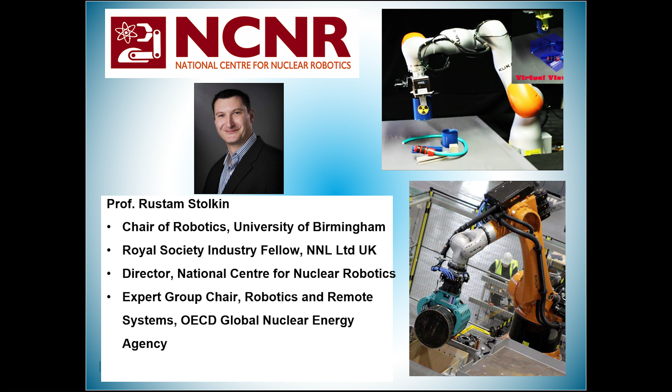My name is Rustam Stolkin. I'm Chair of Robotics at University of Birmingham. I'm also Royal Society Industry Fellow for Robotics, partly embedded with the National Nuclear Laboratory, UK. I'm Director of the National Centre for Nuclear Robotics, and I'm also Chair of the Expert Group on Robotic and Remote Systems for the OECD's Global Nuclear Energy Agency.

The National Centre for Nuclear Robotics was founded in 2017 with a £14 million grant from the Industrial Strategy Challenge Fund, originally a consortium of 8 universities. Via our Flexible Partnership Fund, we expanded to include 12 research institutions across the country from Scotland down to the south coast. In the first 3 years, we produced well over 300 peer-reviewed papers. In addition to robotics, AI and associated engineering, we also expanded to the humanities, political and social sciences, and issues of management, regulation and policy.

We've delivered a very large number of world-first landmark deployments of robots on nuclear industry sites in the UK and internationally. We've also had impact across a number of other industrial sectors, and we've undertaken significant international leadership in EU robotics and also with the OECD's Global Nuclear Energy Agency.

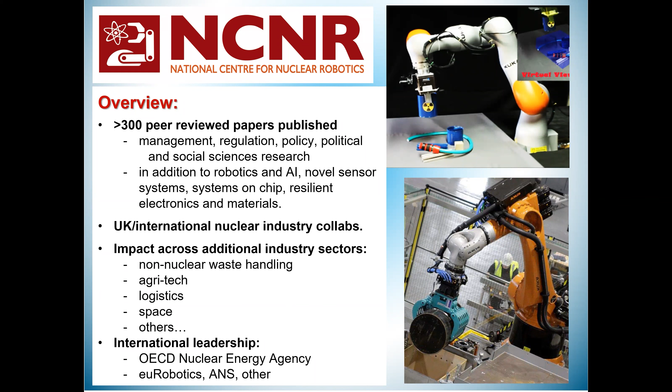I can't discuss in detail all of our research, but it spans a very broad range from advanced robotic manipulation and air and ground vehicles, robotic vision and perception, and also the human aspect and cognitive factors of human-robot interaction, advanced machine learning and AI, sensor systems, radiation-resilient electronics, and autonomous mapping and navigation.

The past 3 years has seen the creation of a number of very significant robotics installations at both Birmingham and our partner sites. These are major robotics infrastructure for long-term use by the research and industrial communities. In this case, you can see the very large 3-ton robotic manipulators set up at our Birmingham Tyseley site, which are the same robots as are going into the Sellafield plants for robotic waste sorting and segregation.

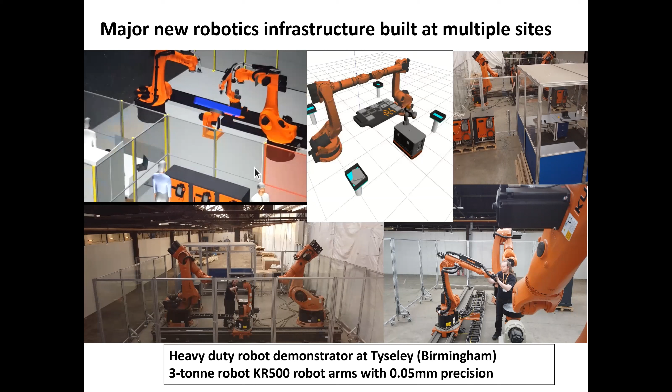So National Centre for Nuclear Robotics spans a very broad range of different kinds of robotic activity, but we are particularly strong on advanced manipulation with robot arms and hands.

This is work from University of Birmingham on fully autonomous robotic grasping, and these are objects for which the robot has no prior knowledge and no prior models and doesn't require even any training data. And what we're addressing here is the very difficult problem of grasping and removing objects from very cluttered random heaps of objects.

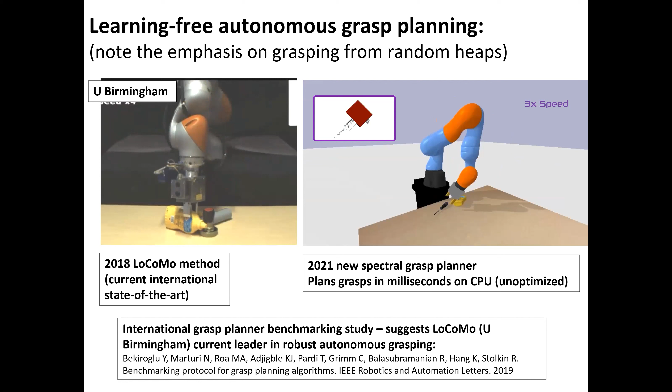National Centre for Nuclear Robotics has a major strength in advanced robotic manipulation. This is currently world-leading work on fully autonomous grasping and manipulation of unknown objects of arbitrary shapes from random heaps using computer vision.

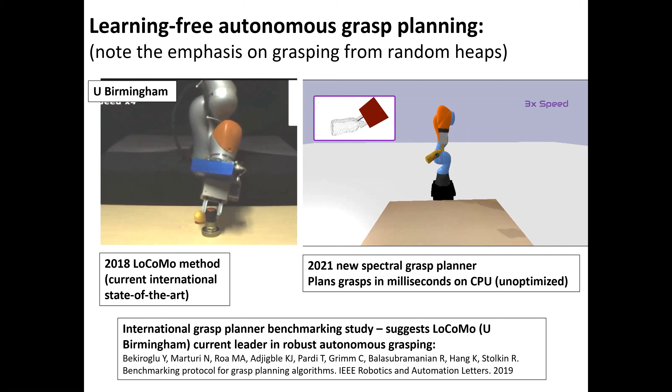Another way that we can augment computer vision is with tactile sensing. Here on the right, you can see a robot feeling its way around a hexagonal bolt, using its torque sensors to perceive shape. And on the bottom right, you can see that it's successfully reconstructed the hexagonal shape of the bolt head.

On the left, you're seeing a very advanced dexterous hand with tactile sensor arrays, and it's making successive tactile glances of an object to gradually improve its understanding of the object's shape. But at the same time, it's also simultaneously refining its grasp pose to find the most robust and secure grasp while it's also exploring.

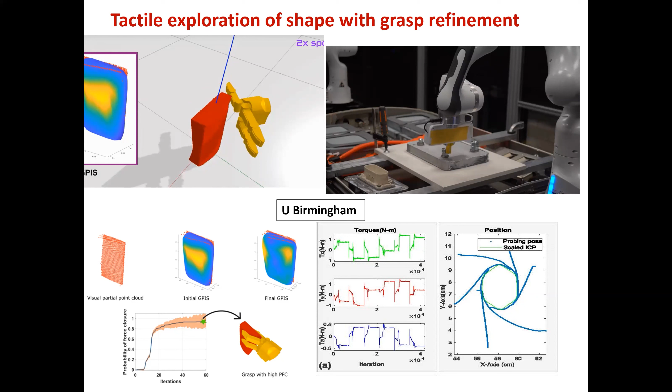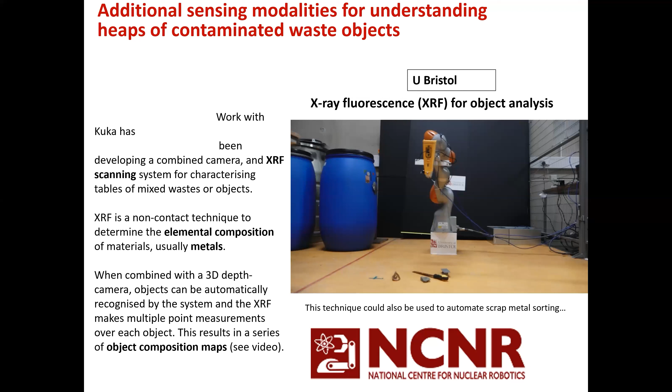Adding additional kinds of sensors can further assist with this problem. This is work from University of Bristol using XRF sensors to look at objects in a heap and tell the different materials of the objects from each other, which can help for sorting and segregation and also disambiguating objects.

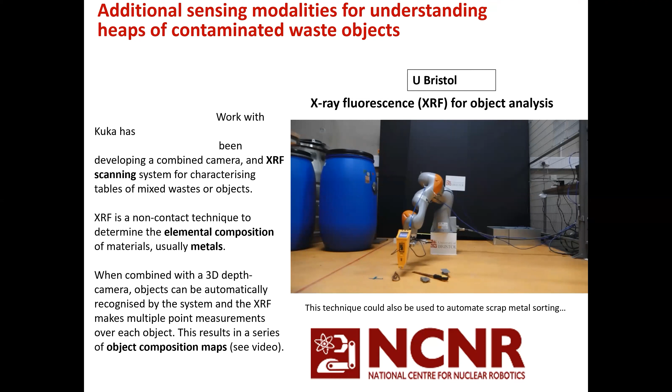So what we previously showed you was fully autonomous manipulation, but here is work from University of Lincoln working with University of West England at Bristol Robotics Lab on teleoperation, using one robot as a master to control an identical remote robot in a leader-follower paradigm. You can see that using both robots as leader and follower provides a very intuitive and easy to use control interface.

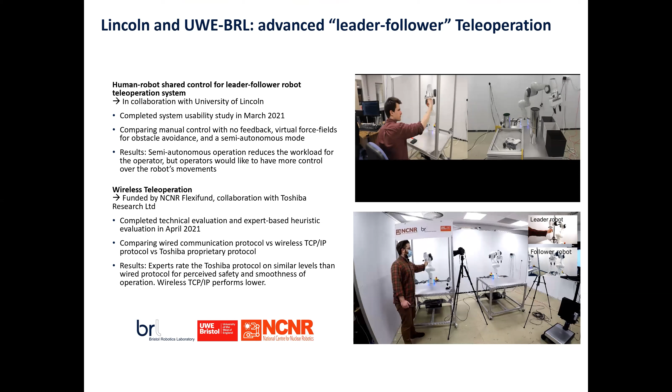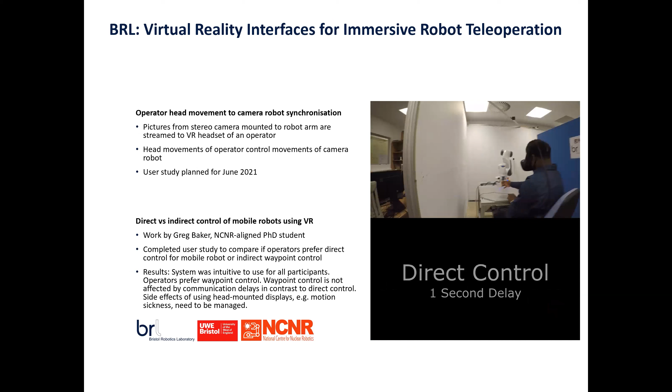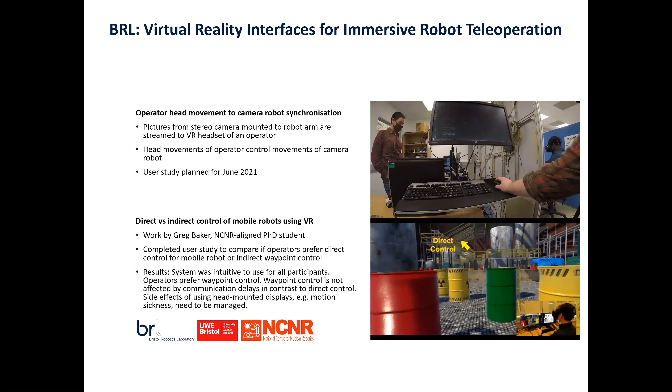So to support this remote handling and control of remote manipulators, we need situational awareness, and this is work from Bristol Robotics Lab, University of West England, on telepresence and advanced ways of allowing operators to perceive what's happening at the site of the remote robot in the hazardous zone.

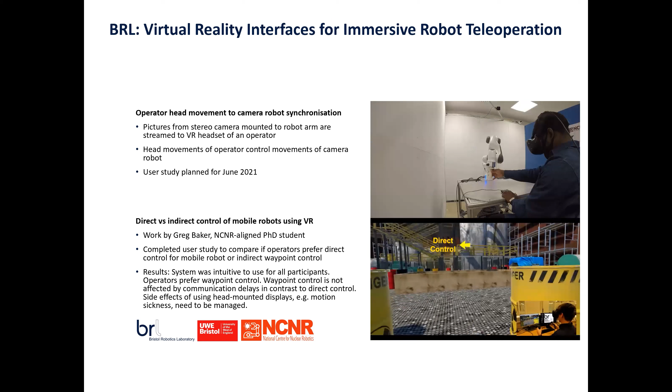So this is work from Queen Mary, and this is the design of very novel kinds of manipulators, soft manipulators, called an eversion manipulator, so it extrudes itself from the inside, and you can see that this can travel through narrow pipes, tubes and openings, and it can deliver cameras and sensors to hard to reach places. It's soft so that it will not damage any delicate pipework or other infrastructure.

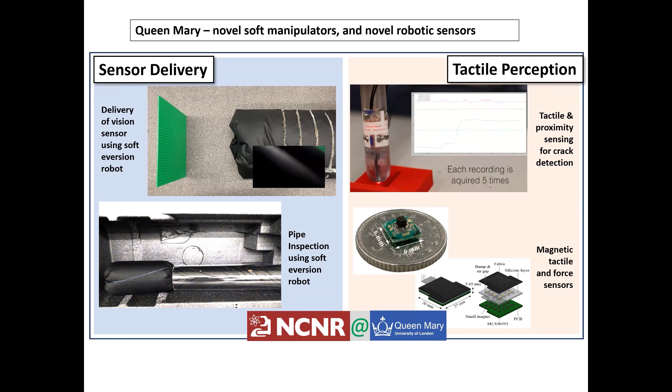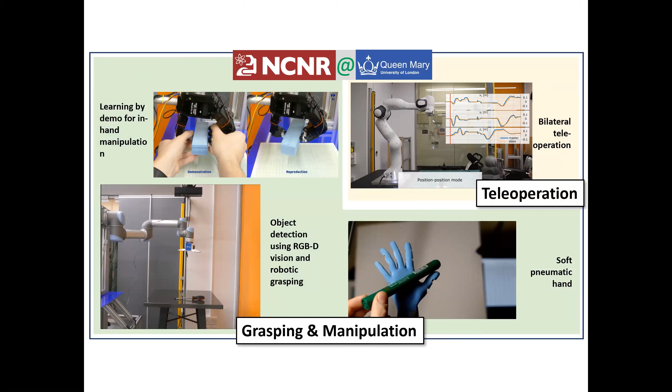And there's also been interesting work developing novel forms of sensors, novel tactile sensors and things like that. Queen Mary has also been working on teleoperation of manipulators with haptic feedback and soft manipulators as gripping tools.

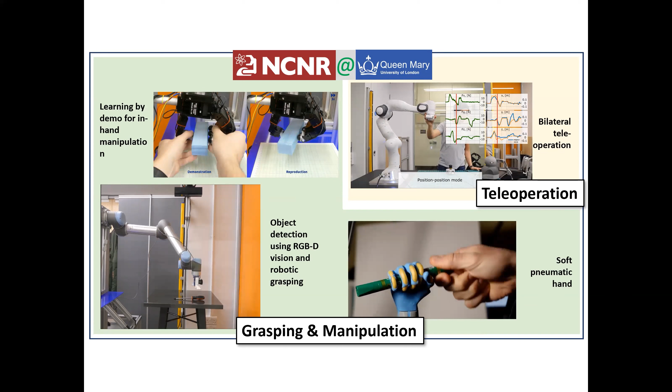At the opposite end of this spectrum from the lightweight soft manipulators is work happening at Lancaster University on very, very heavy duty, powerful hydraulic manipulators. I believe they're the only lab in the UK, possibly in Europe, that actually does work on this heavy duty hydraulic machinery, which is widely used throughout the nuclear industry, so it's particularly important. It has extremely complex dynamics and control problems to control the actuated joints in the ways that you want.

Related mathematics can also be used to look at the complex control problems of quadcopter drone robots.

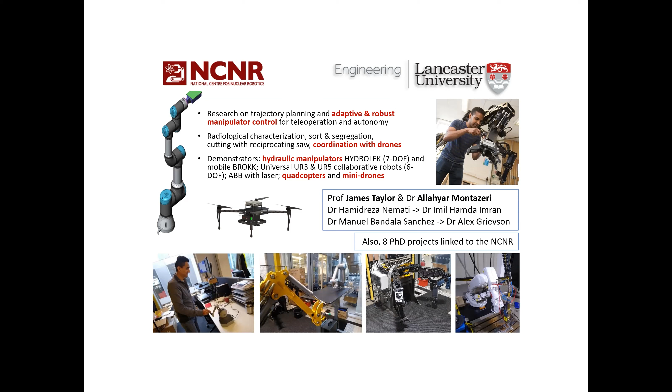Lancaster's work was on the low-level control of the joints of the manipulators. At Birmingham, we focused more on the high-level planning of the motions. Here you can see a mobile manipulator planning cutting actions and cutting paths. What's difficult here is you have to plan the motion of the wheels of the vehicle, the motion of the joints of the arm, and the motion of the cutting tool over the cut surface, and all three of those motions have to be planned mutually with respect to each other to be consistent.

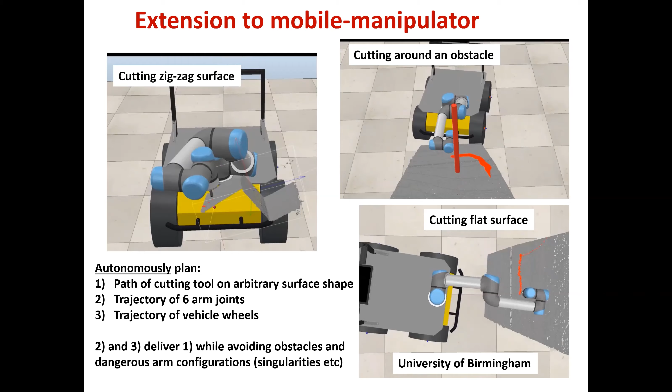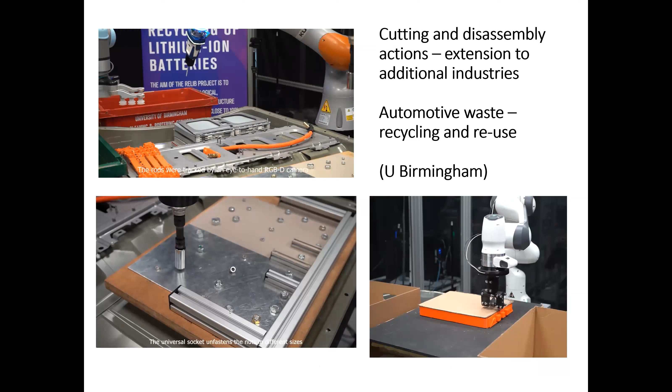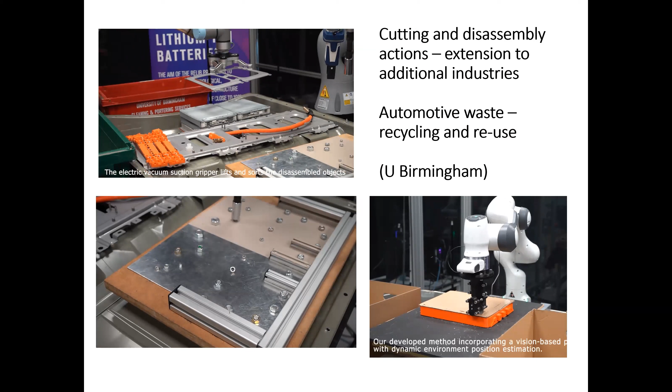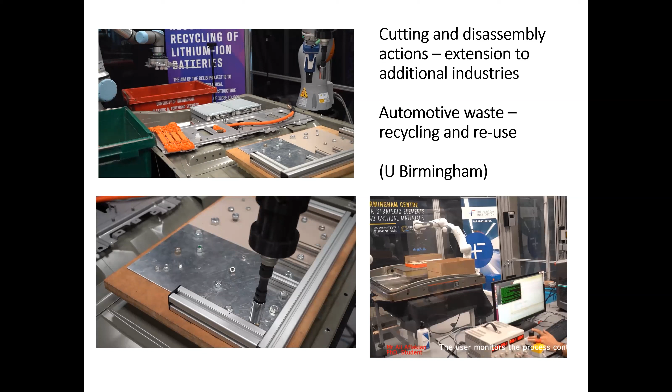One of the remits from the Industrial Strategy Challenge was that, as well as having strength in nuclear, we should show how these generic robot technologies can be applied to other industries and societal problems. Here we're looking at handling of non-nuclear waste, in particular how to deal with the very large lithium ion battery packs in electric vehicles, which is actually a potentially very hazardous form of waste. Here you can see robots performing very complex disassembly operations, cutting and unbolting and removing components from these very complex waste streams.

Bringing us back to the radioactive environment, all of these robots need to operate in various kinds of radiation fields and radiation environments. University of Essex has done fantastic work building partnerships with NASA Jet Propulsion Lab, Rutherford Appleton Lab, and the National Physical Laboratory, and these organizations have radiation facilities that they've made available to Essex.

What you can see here is Essex putting cameras, sensors, circuit boards, and computer chips inside radioactive chambers and bombarding them with radiation to see how they deteriorate and model that deterioration. On the bottom right, what you're seeing is a camera in a radiation field, and that bright speckling is the radiation particles hitting the pixels of the camera.

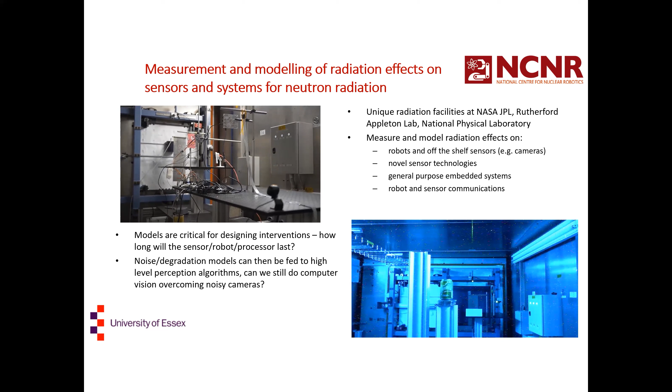To overcome these challenges, Essex has been developing very novel methods to make systems on chip resilient, including self-healing electronics - electronic systems that detect their own faults, computers detecting their own faults and self-healing to rearrange themselves to repair those faulty parts. Some of this is now working using deep learning to learn how to automatically adapt firmware, software, and hardware to overcome these faults.

There's further work also now that we can put complex electronics into high radiation environments. University of Bristol has carried out deployment with Sellafield with a crane-mounted sensor package - the suitcase, if you like - and this is building up 3D maps of the stored material in radioactive waste stores and mapping the radiation emissions from them as well.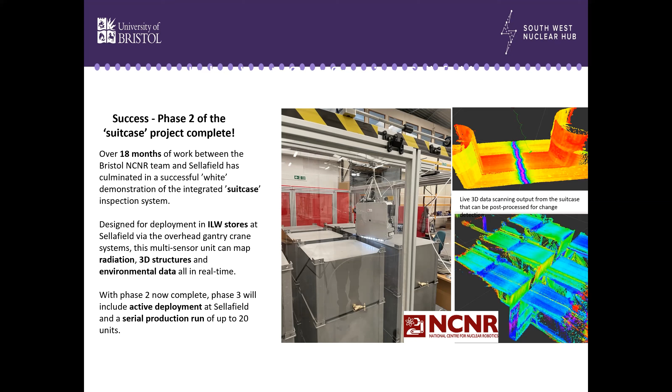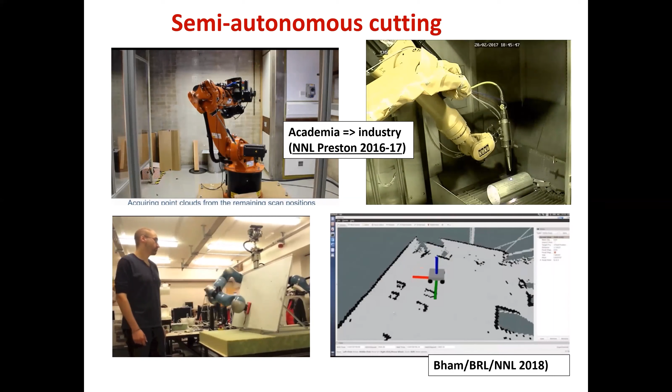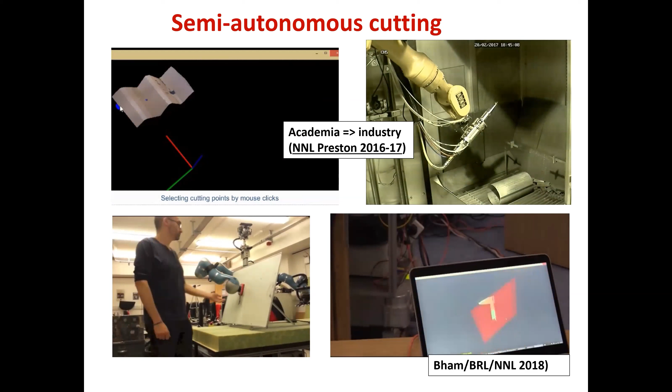Just to reiterate, we've been doing this for real. Top right is the first ever deployment in history of an autonomous AI-controlled robot arm in a radioactive environment. This is work that University of Birmingham did with National Nuclear Lab at the Preston Springfields nuclear plant, laser cutting contaminated steel.

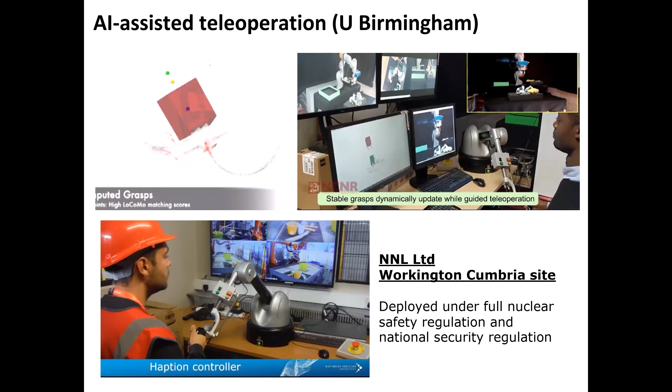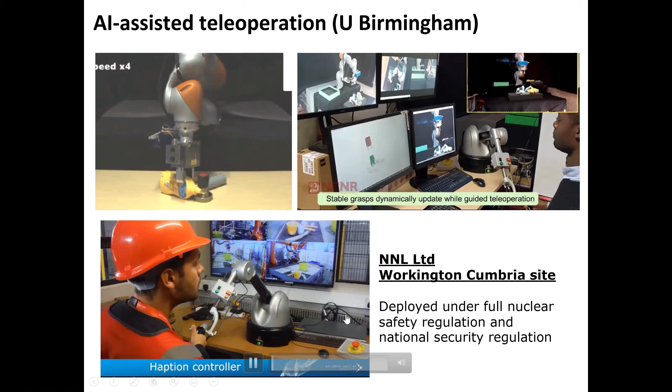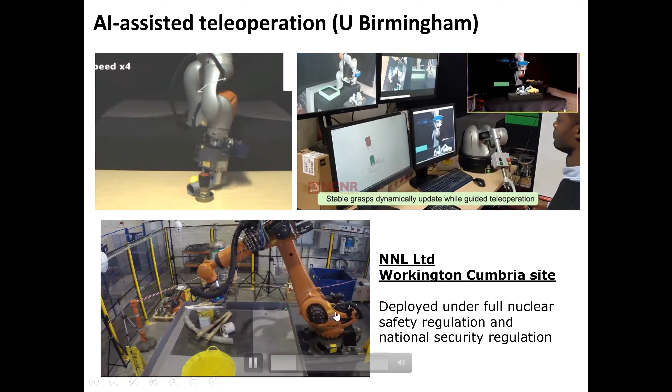This is using AI autonomous grasping as an operator assistance technology to aid a human during teleoperation. On bottom left, you can see this being deployed at National Nuclear Lab's Workington site in Cumbria, controlling very heavy duty industrial manipulators. This is a nuclear industry worker testing the system out, and this is being deployed under full nuclear safety regulation and national security regulation.

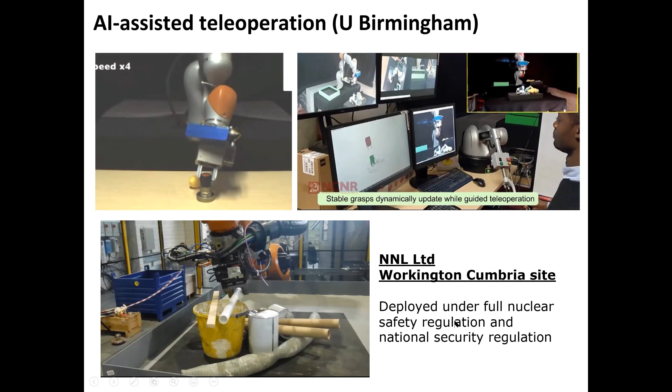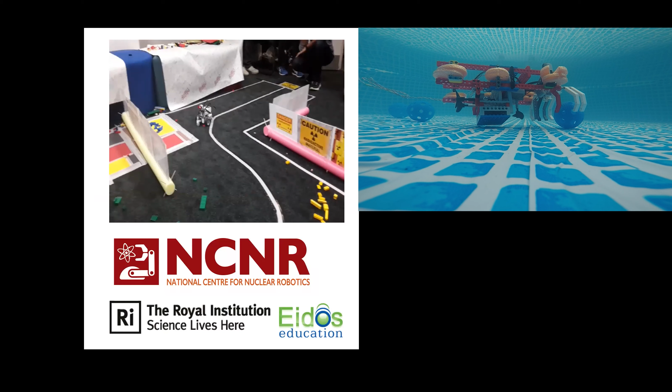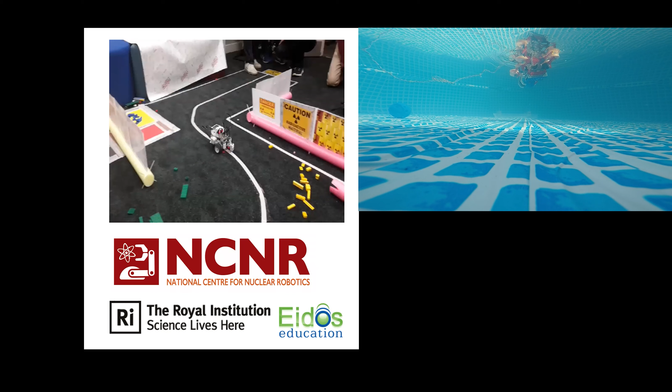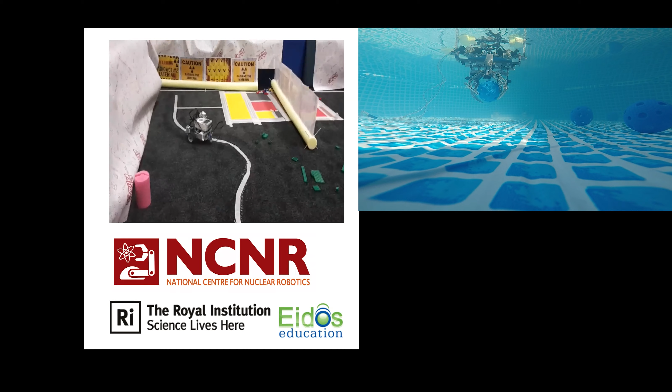NCNR has always been very prominent in educational outreach. We have over 10 years collaboration with the Royal Institution, and I myself have a longer collaboration with Eidos using hands-on practical projects with robots, building robots and building sensor systems in the classroom as ways of teaching science.

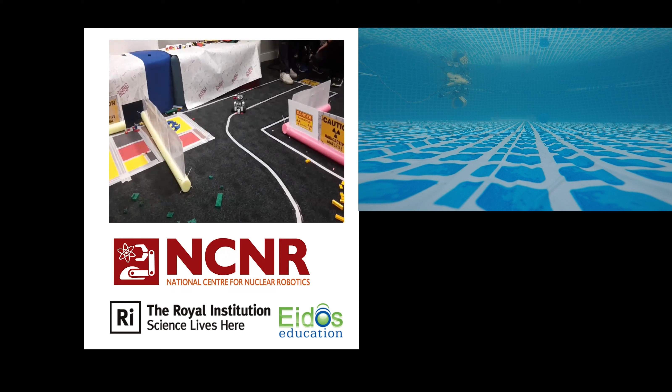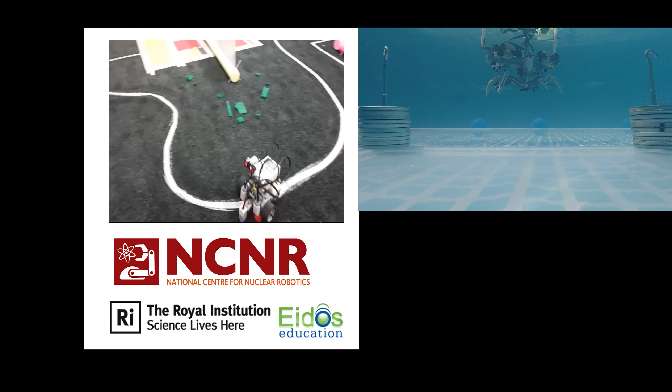Through the Royal Institution, we've done summer schools every year, but we also help them reach out to masterclasses to schools nationwide. That's been very difficult during COVID, but we've been assisting the Royal Institution in developing masterclasses in a box - they send a box out to school districts and keep that work going.